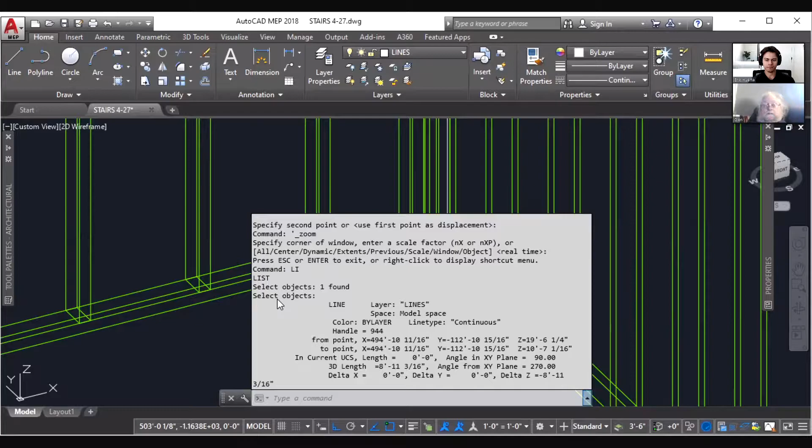Okay, and the reason I stuck it up there is so that we can measure from the top of it down to the floor here. All we have to do is measure that line, and that gives us our true height. And as you can see, it's 8'11" and 3/16. So when you're doing a set of stairs, we have to get from bottom to top.

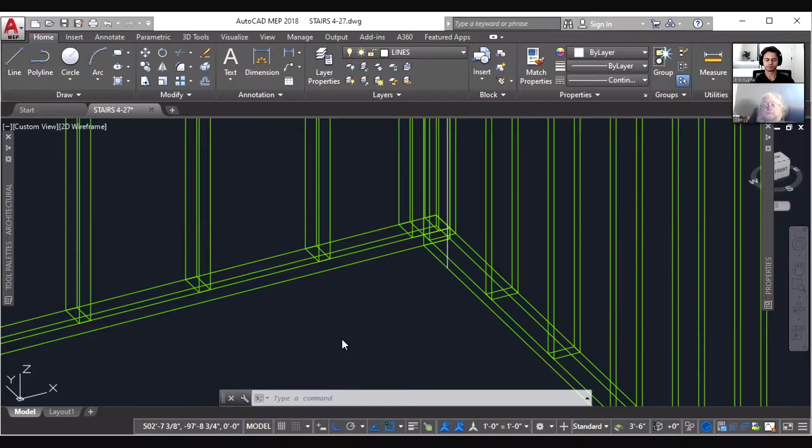And what we have to do is divide the entire rise. What we just measured there is the total rise. We've got to measure that, and then we have to divide that into equal parts. Now, we've got to go from point A to point B, and we have to determine how many risers we're going to need. Okay, so I'm just going to guess.

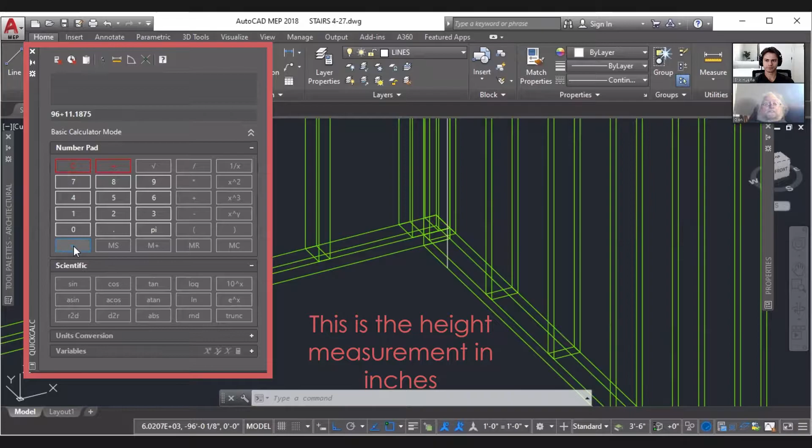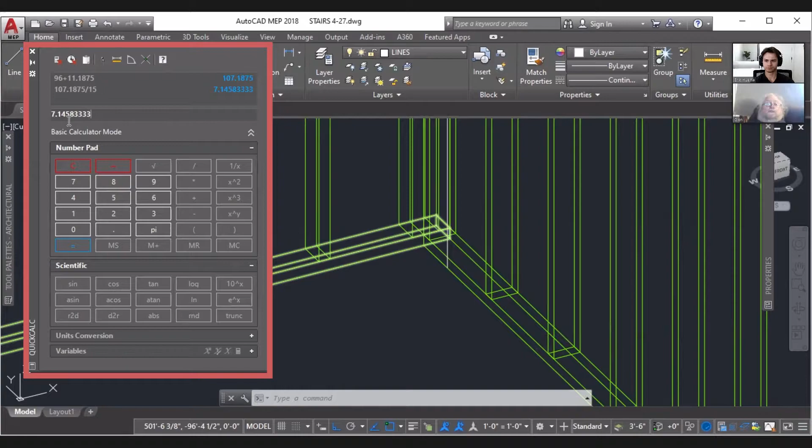I'm going to go 96 plus 11 and 3/16. 0.1875 is 3/16. All right, so that gives me a total rise of 107.1875. So if I divide that by 15 risers, that gives me 7.145833. Okay, that's my rise. My rise is going to be 7.145833.

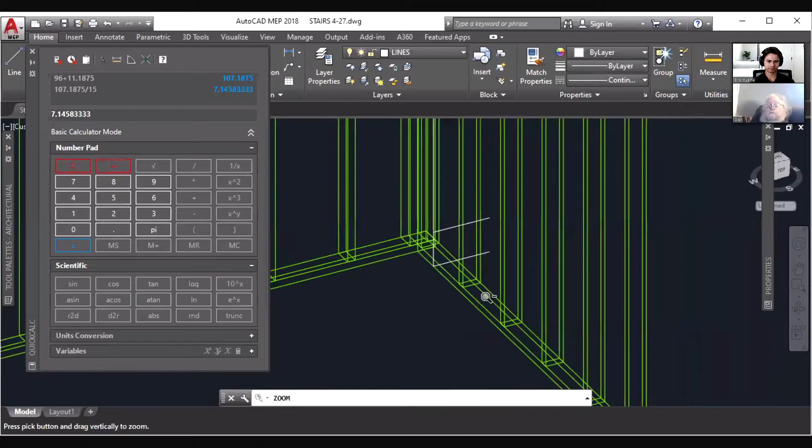Now, what that does is it splits that into equal portions from top to bottom, or from bottom to top, however you want to look at it. We know what our rise is, but now we have to determine what our run is. And to determine what our run is, we have to look at the whole picture. And here's the picture.

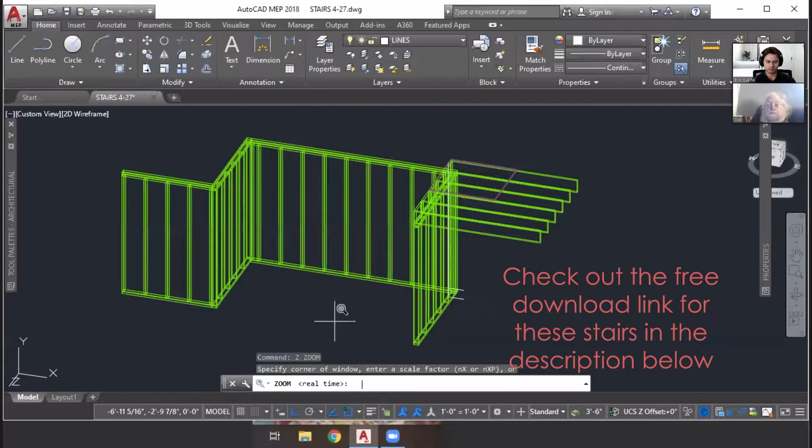Our stairway has to go inside this U-shaped set of walls here. And we don't have enough distance to go from here to there and put one set of stringers in. So we're going to end up with a little landing in here. We're going to have to start our stairs here, go this direction up to a landing, and then go from the top of that landing over this direction to make it work.

And our only constraint here is this distance from here to there, because our stair can't come past this point. This corner, we don't want our bottom tread to protrude past this point. So when we talk about our run, we know that the plan calls for our stair to be 3'6" wide. So if we take 3'6" and we bring it out here, that's how wide our stair can be. Has to be.

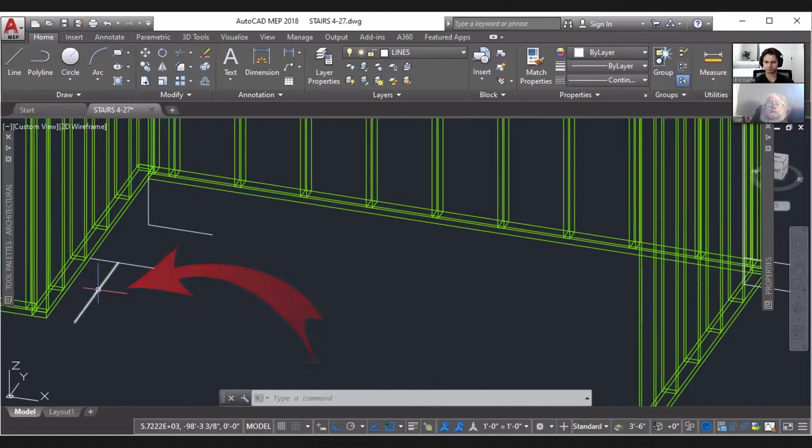So our bottom stringer can only go from here to here. That's all we've got to work with, is that distance right there. So that's our constraint. How many treads are we going to be able to get into this spot right here? Well, we measure that spot. 2'7.5", right? That tells us that if we're going to have our treads evenly split that up, we're stuck with that constraint right there.

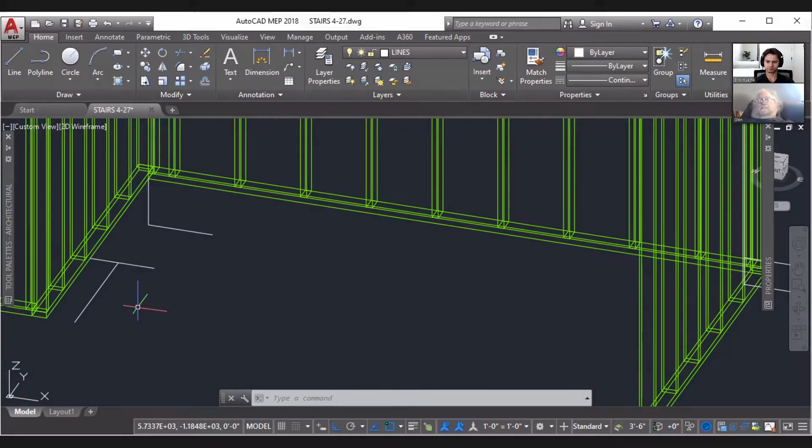We know what our rise is, and we know now that we have to split this up evenly in order to make our rise-run combination. So we're stuck with a tread that's going to be 10.5 inches. Catch my drift? Let me zoom out a little bit so we can actually see the whole picture. What I do is I create what I call a virtual stair.

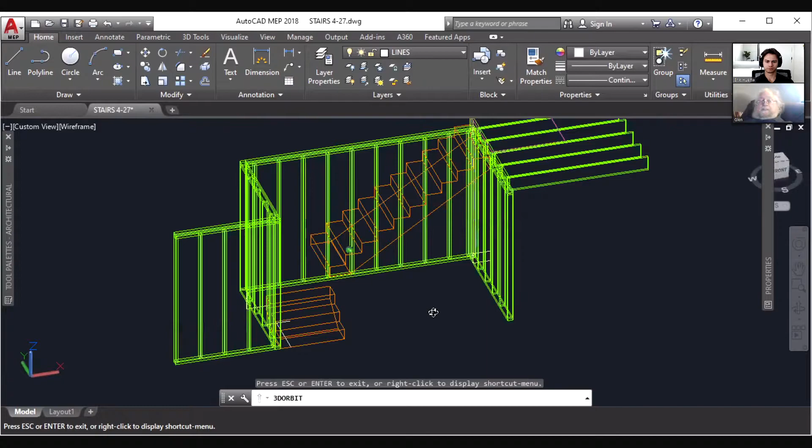And that virtual stair, using the constraint that we just determined because of the distance that we have to go, and using the width the staircase is supposed to be, gives me something I can visualize of what that stair is going to look like. But that's not our stringer. That's our virtual stair. That's what the total stair is going to look like, going from point A to point B. And that tells me what my landing's going to be.

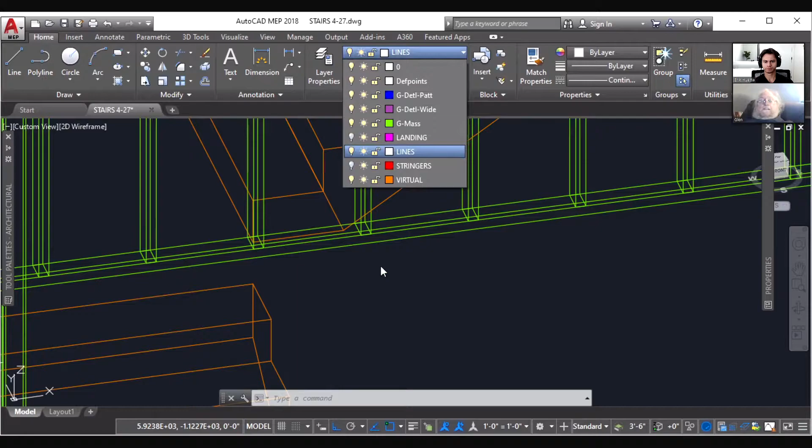Okay, I can make my landing work with that. So I just framed a landing in there that can be made whatever size we want this way, but it's limited to 3'6" this way. See what I'm saying? Yes. Let me rotate that around so you can visualize. I made it in different colors so you can see what I'm talking about.

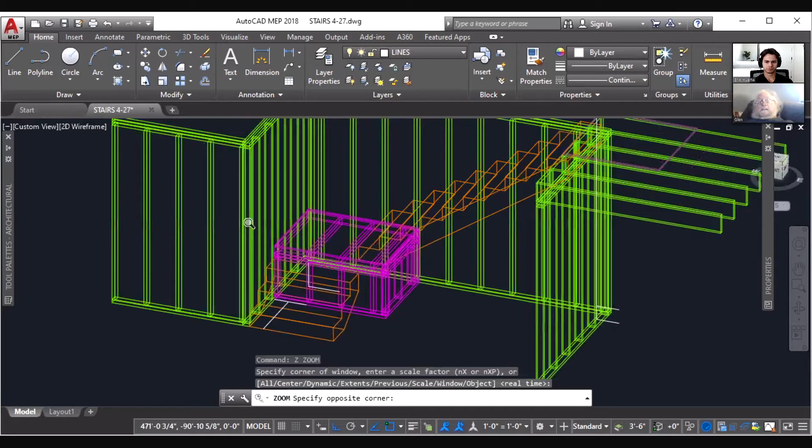This little stringer right here is the stringer that leads up to your landing. And it's only got 3 treads. It's got 1, 2, 3 treads. And then your 4th step is up onto the top of your landing. Then you turn the corner and you got to go from the landing to your virtual stair here.

Now, for me, the importance of this virtual stair is so that I have something that I can make my stringer from. This is not the stringer, because the stringer has to take into consideration the thicknesses of plywood that are going to be covering the stringer. But it gives me my high points. Each one of these points right here is the nose of the step.

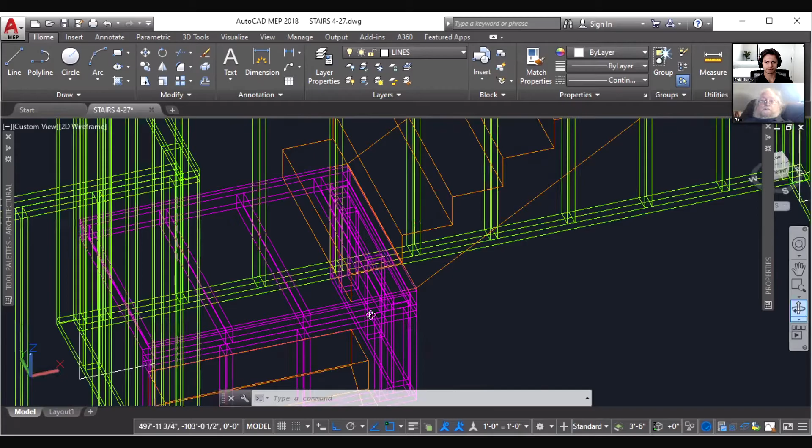Okay, let's go down and let's talk about this little one first. You can see that my virtual stair lines up with the end of this wall here. But I've got a 1/2 inch piece of plywood that's going to be nailed against the risers that I have to account for. And then my stair tread itself is going to be made with, the plan calls for 1 1/8" plywood for the tread material.

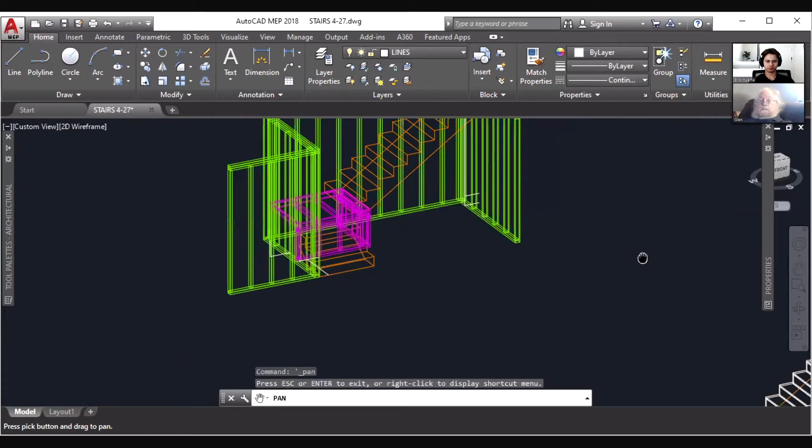Well, in actuality, that's 1.069 is what that plywood actually measures when you buy it. We make our stringer so that it takes into account these thicknesses. Watch this. Now here, this represents the nose. That's the nose of the actual stair itself. But this thickness of plywood is 1 1/8", and this thickness is 1/2 inch.

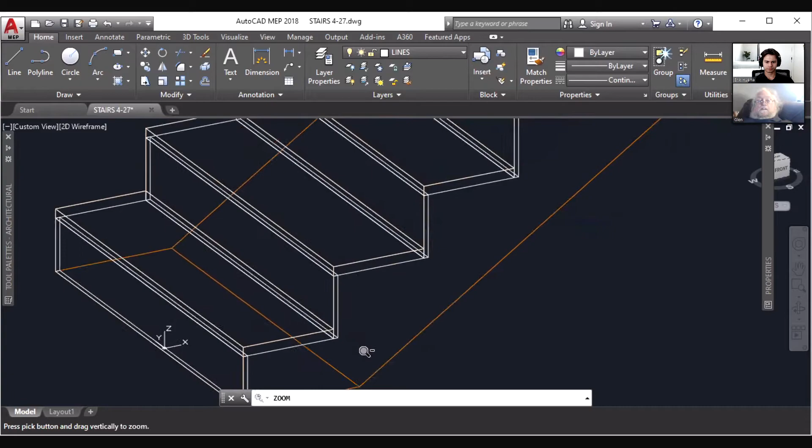Okay, so your risers are always applied first. As we go up the stair, you'll notice that the 1/2 inch plywood is nailed on first, and it goes right against the stringer. And then the tread covers the stringer, and it covers this 1/2 inch riser here. All right. So that's how it's done. We make our stringer to account for those thicknesses.

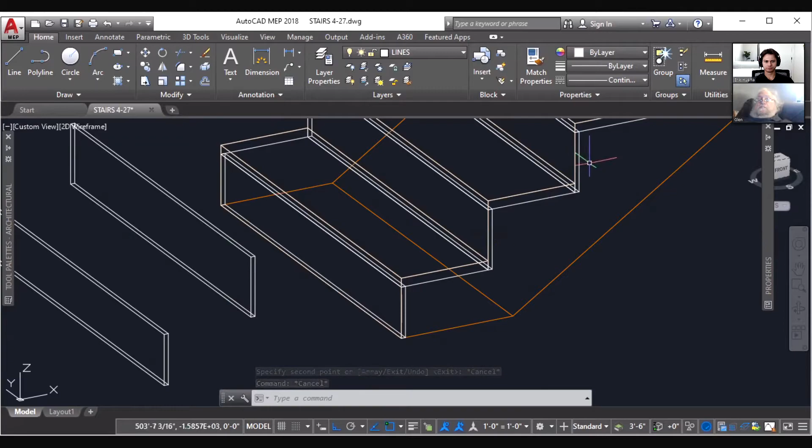And then this bottom one, you'll notice that this piece of plywood is shorter than this piece. That's because we had to allow for this 1 1/8 thickness of plywood here. In other words, these two pieces of plywood here, this 1/2 inch piece and this 1/2 inch piece, they're not identical. This one has been shortened to account for this thickness of plywood. Catch that? Other than that, they're all equal all the way up the stair stringer.

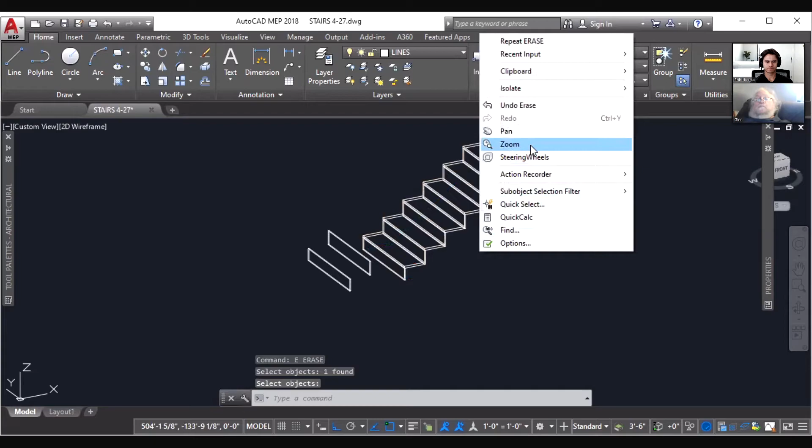Okay, so let's zoom out here and let's get rid of this virtual stair. And now all that's left is our plywood. All right, now let's turn on the layer where we've got our stringers. So I made my stringer having those pieces of plywood in position. Okay, now you're seeing it, right?

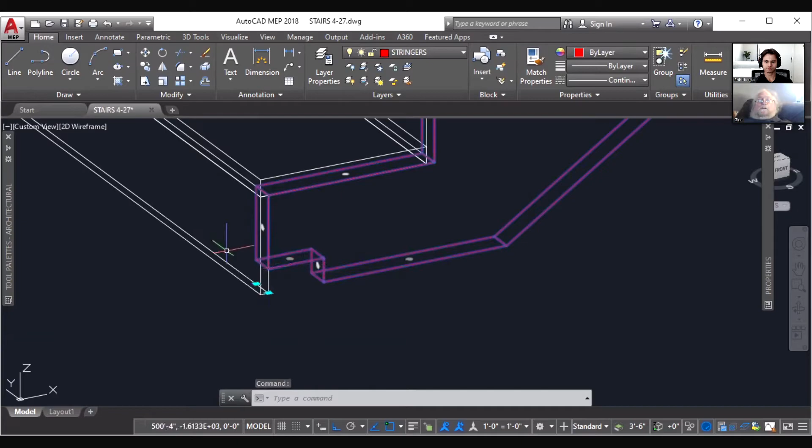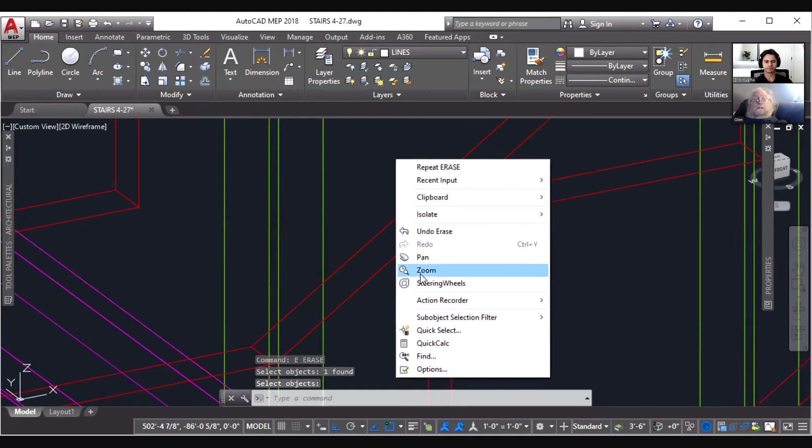Well, this stringer is made from a 2x14, and it's got a little notch in it for a piece of 2x4 that's flat on the ground, or in this case it's on the landing, because this is the upper stringer. This is what your stringer attaches to, this flat piece of 2x4 on the landing. Okay, so let's go back over here. Now I can get rid of my virtual stair here, and now all you see is the stringers. There you go.

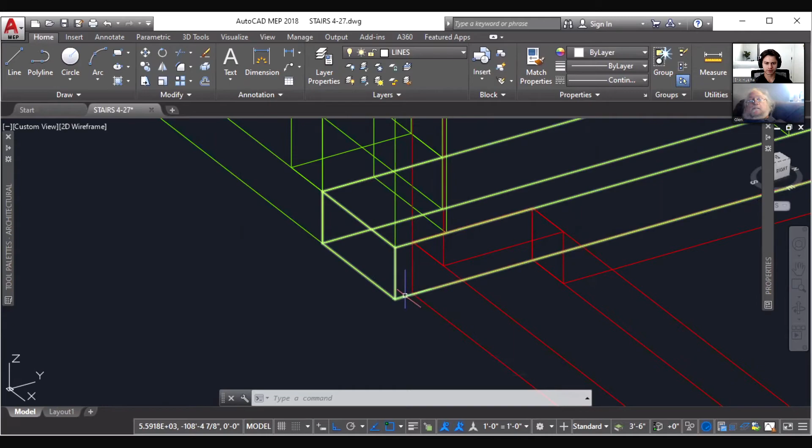Notice that on this bottom stringer, this is held back 1/2 inch from the edge of this wall. And that means that once your riser plywood is nailed on there, it's not going to be protruding. But these are your actual stringers. I could copy these and just bring them out here like this. And then I can zoom in here, and I can turn these into STL files, and I can email them to you.

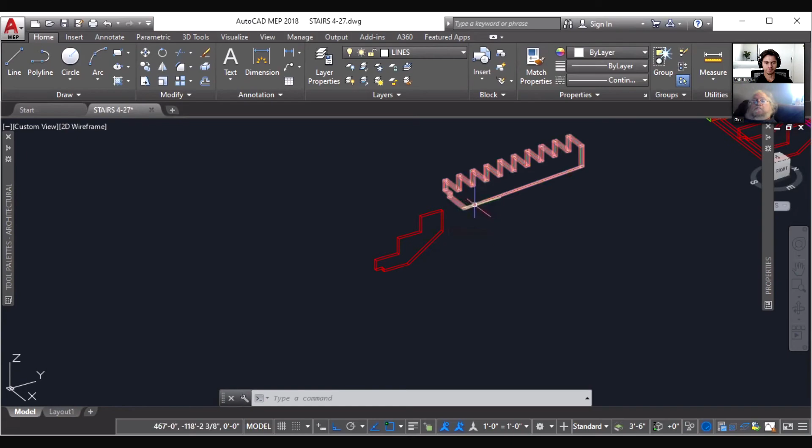All I have to do is convert this to a solid and this one to a solid, and I can easily turn these into STLs that you can use your 3D tool software to view and measure. And I can email these stringers to you, and they'll fit just like you just saw them fit. And the adjustments have already been made for the thicknesses of plywood, so this works all the way up, and you've seen it.

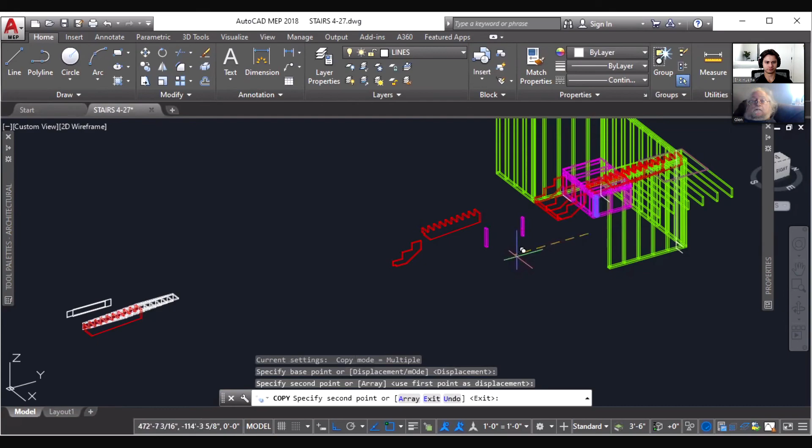Not only that, but I can give you the studs for your landing. Look at this. Let me copy this one out. It's a different color, but STL doesn't care. If I turn that into a solid, I can email that to you too, and it gives you the exact length of the stud for your landing. So you don't have to worry about calculating it. I've already done it for you. There you go. That's how it's done.